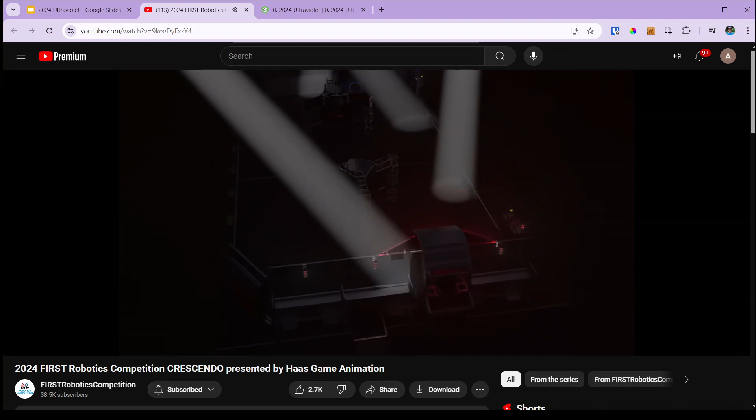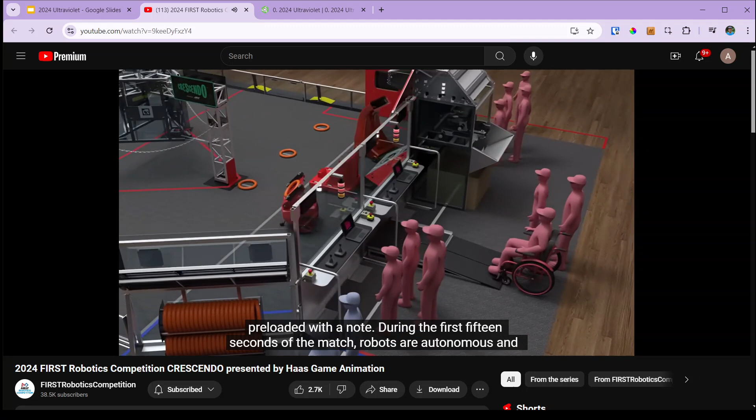Welcome to the 2024 FIRST Robotics Competition game, Crescendo, presented by Haas. 2 alliances of 3 teams each compete to score or play notes in 3 different field elements, amplify their speaker, get on stage, harmonize, and take the spotlight before time runs out. Alliances earn additional rewards for meeting specific scoring thresholds and for cooperating with their opponents. Robots start each match inside their alliance's starting zone and may be preloaded with a note. During the first 15 seconds of the match, robots are autonomous and can be programmed to leave their starting zone, play preloaded notes in their speaker or amp, and collect and play additional notes.

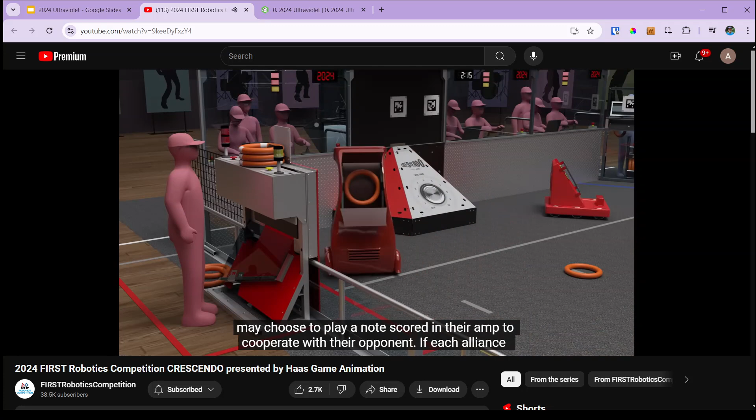During the following 2 minutes and 15 seconds, drivers control their robots. Robots collect notes from human players at their source and play them in their amp and speaker. Each time an alliance plays 2 notes in their amp, the human player can hit a button to amplify their speaker for 10 seconds. Notes played in an amplified speaker are worth more points than those scored in an unamplified speaker. A human player may choose to play a note scored in their amp to cooperate with their opponent. If each alliance plays a note by hitting their Coopertition button in the first 45 seconds of teleop, all teams in the match receive a Coopertition point, which will influence a team's rank in the tournament. The number of played notes needed for a bonus ranking point is also reduced.

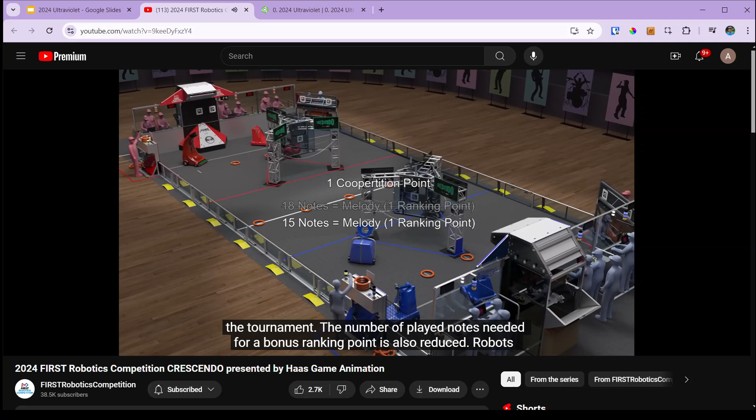Robots are protected from contact by their opponents when at their podium, off the ground, and during the last 20 seconds of the match while in contact with their stage. As time runs out, robots race to get on stage and deliver notes through the flap and into the trap. Bonus points are awarded for harmony when robots on stage use the same chain. On-stage robots earn even more points if a human player spotlights the robots on a chain by scoring a note on the chain's corresponding microphone. The alliance that earns the most points wins the match.

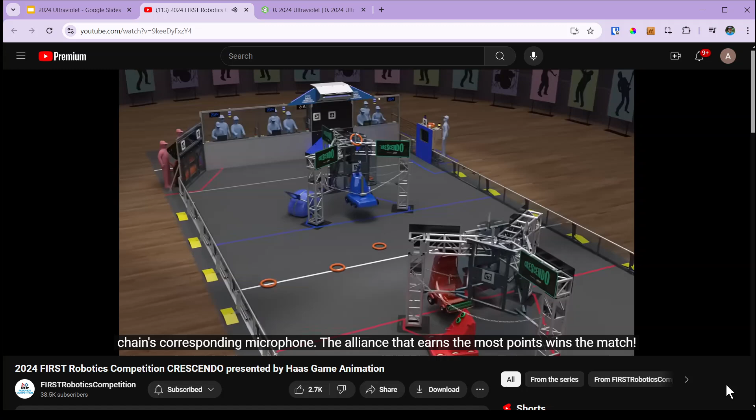All right. So looking at that, basically how we're given the challenge every year is we have some sort of animation, then we're also given the full manual, which goes through all the exact rules. So the animation kind of gives us a summary, gives us kind of an idea of how we're going to have to play the game and what kind of tasks we have to do.

But then our job is to read through the entire manual and kind of start figuring out how do we actually think robot play is going to work, and how do we start breaking down the actual tasks that the robot is going to have to do for us to be able to design a quality robot that's going to do well at the actual events.

So even though that was like that 2-minute video and it talks about all of the different things the robot can do, we end up breaking it down to a relatively small subset of things, what we actually care about doing. And so the simplest form of this game is the robot has to be able to pick up notes.

They don't actually have to, right? You could have them always get them from the human player and get them dropped in. But we just know that was going to be slower, right? If you ever miss a note, you don't want to have to drive all the way down to the other end of the field, get a new one. You'd rather just be able to pick it up and score it again. We need to be able to launch notes into the speaker. That's where you get a lot of the points, from putting them in the speaker directly.

And then the amp was there to be able to make your score even higher if you could coordinate basically the pattern at which you were scoring. And so we wanted to be able to amp really fast too. And then for the end game, the way it all ended up playing out with points, it made the most sense, if you could do it quickly at least, to climb and put a note in the trap. So if you were going to do everything in the game, you basically had to do those 4 things very well.

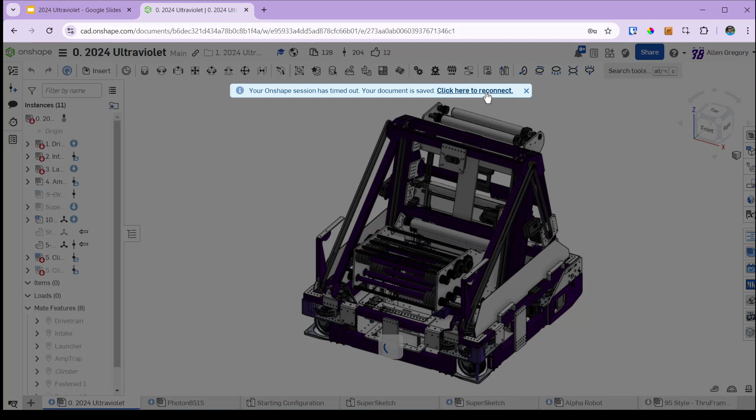All of the robot CAD for our team is done inside of Onshape. It's a browser-based CAD program that lets us fully design every part of it; every hole on the robot is fully done in CAD before we ever produce anything. There's some stuff that we won't CAD exactly, so a lot of the actual wiring and things we won't put into CAD, but we will think about where it all goes.

So we do know if we put a motor somewhere that has to have wires running to it, we do have to think about how the wires are going to get to that motor. And so we will leave space sometimes, or we will sometimes CAD different parts of it to make sure we have a good concept of where the wiring is going to go. But nearly everything else, pretty much every mechanical feature of the robot, any piece of plastic, anything like that, will get put into CAD.

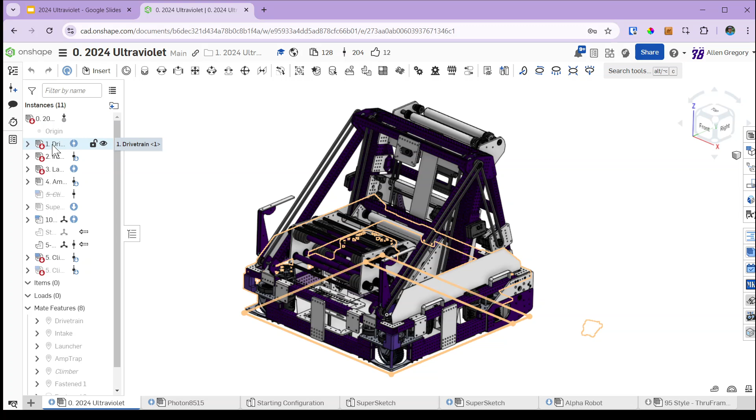Okay, so looking through this, we end up having 5 subsystems. That's roughly what we try to break robots into. Sometimes we have to get up to 6. Sometimes there might be fewer if the robot ends up having some things that are more integrated. But there's roughly 5. And so the 5 that are on this robot are the drivetrain, the intake, the launcher, the amp trap mechanism that's able to put the notes in the amp and then also extend higher and put them into the trap when we climb, and then the climber itself.

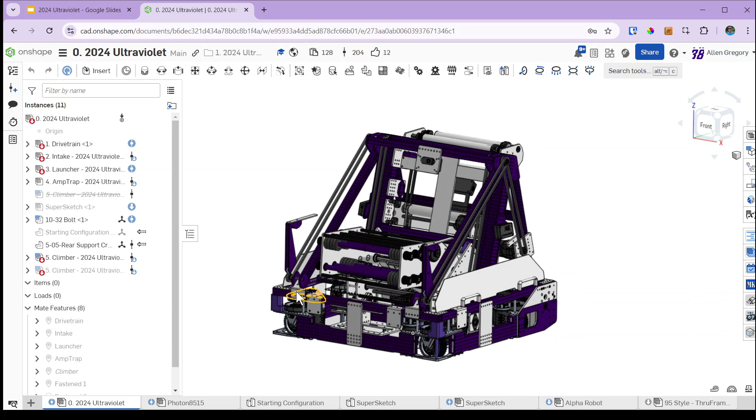The CAD here will have some hidden parts and things, but this is largely pretty much exactly what our competition robot looks like right now. There's a few tweaks that are on the robot that aren't shown in CAD right now. There are different versions of parts and things, but the vast majority of things are correct, or at least in some version of our robot. So our state champs version, this is very much close to what it was looking like.

All right, so we're gonna look at our drivetrain here. So we can open link document and that'll pull us over to just our drivetrain document. And so the drivetrain is relatively simple in this robot. There's not a whole lot going on.

Some of the basics here, we have our frame, so the tubes that go along the outside of the robot are going to be the frame for the robot, and this gives us our base structure to mount everything off of. And then we have our belly pan. And so this connects the main 4 sides of the robot and gives us this middle structure to be able to mount a lot of our electronics. It also holds some amount of the actual robot structure together too. So a lot of these holes are for mounting the AmpTrap elevator and parts of the launcher mounting as well.

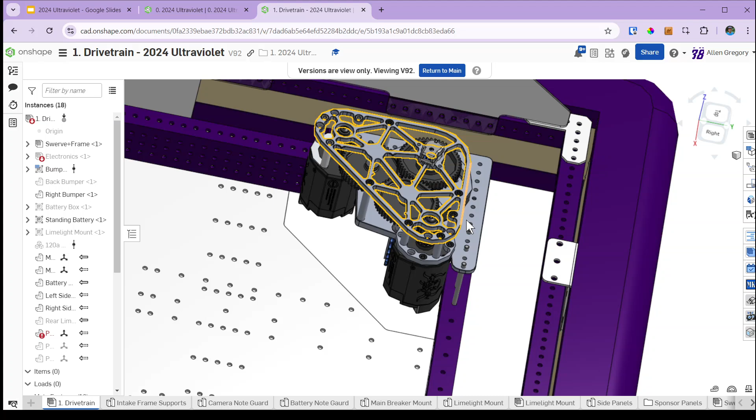The absolute base for the robot, then the way it actually drives, and pretty much for near 80+% of robots now or something along those lines, it's getting higher and higher each year, are our swerve modules. And so in the corner of every competition robot we'll probably build for the foreseeable future, we'll have swerve modules in the 4 corners, unless it's an incredibly strange game for some reason that drives us in some other direction. This kind of standard packaging has become the default. It's pretty much looked the same way since our 2022 robot. They've had pretty similar drivetrains.

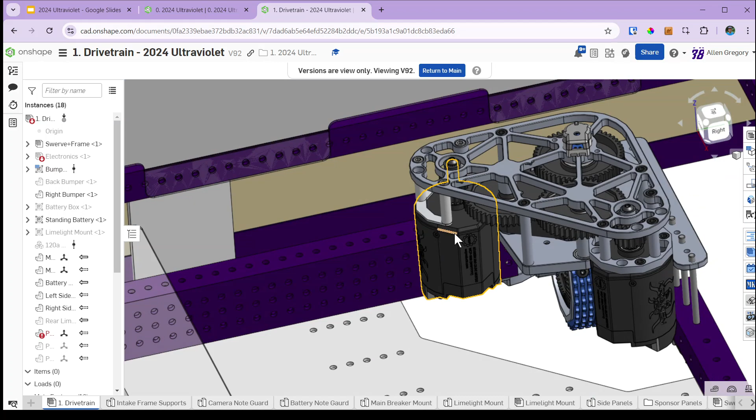The swerve modules work in that you have two motors on each module. So in this one, this motor here is powering the steering of the wheel. So the wheel's able to fully spin 360 degrees and can point in any direction. And then the other motor is powering the actual driving of the wheel, its velocity, which isn't set up in CAD, but you would imagine it like it's driving around, moving the robot. So if all the wheels are pointing in the same direction, that's the direction the robot can go.

But then our software can do all of the math that allows us to have the robot be spinning while driving in any of the straight lines. We can drive sideways at any angle. We can spin in any direction. We can turn the wheels all into like an X configuration, so then the robot can't be pushed very easily. And so all of that's happening without the drivers having to manually turn each wheel or anything. All of that math is being done by the software running on the robot.

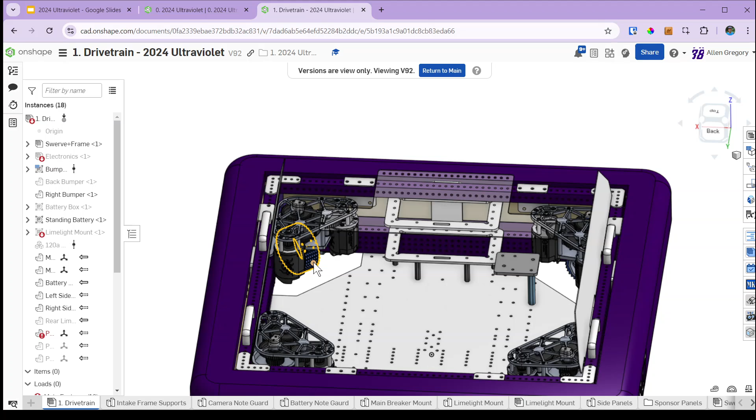So if you point the stick, the one that's controlling the robot, forward, the robot just goes away from you, no matter which way it's pointing. So you can spin it while pointing away from you. It's still going to drive away from you while turning. So it's a very intuitive way to control the robot, and it gives us a lot of flexibility compared to a robot that just has what we'd call standard tank drive or differential drive, where we have 2 rows of wheels on each side, and you're only able to turn kind of like construction equipment, like a skid steer, bulldozer, or something would be able to drive. And that worked for a long time. All of our robots pre 2021 were driven that way, and it did work.

But now swerve has just gotten a lot easier. A lot of the things needed to be able to build these drivetrains have gotten either cheaper or more performative to where they perform better. A lot of the other rules around them were relaxed to make it easier for teams to do. And so more and more teams, pretty much every team, one of their first goals now is to figure out how to get to a productive swerve drive. As you can just do so many more things, and it makes all your other mechanisms easier to build once you're able to drive sideways. And you don't lose any traction or anything either.

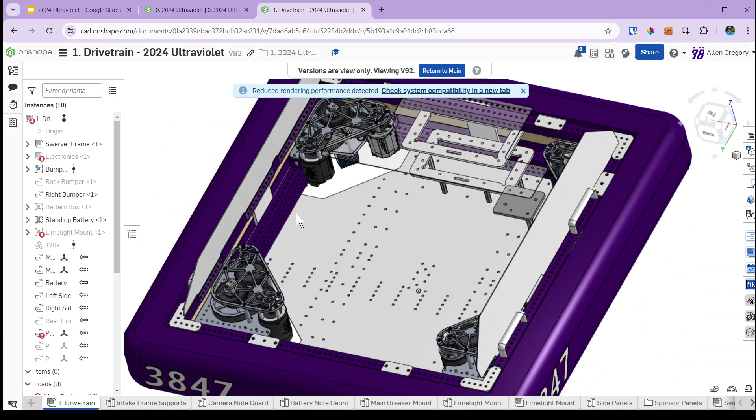Some of the small things we do, so we also have the bumper mounts going around the whole outside. So you have the bumpers here. We can go ahead and hide some of that part. This is the wood on the inside that we needed, so we knew where the holes were. So we're making the templates for that. So that's why those are CADed separately.

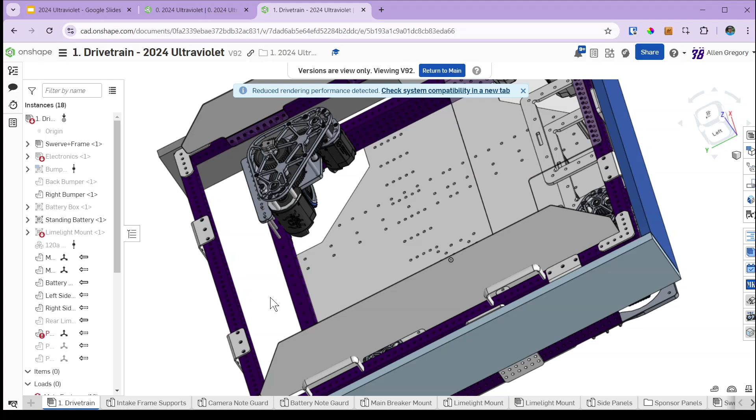And then this one did have some special features compared to most years, where we had this upper frame mounted at a different place than the lower frame, so that our intake could basically be beyond our wheels. This gave us a really wide intake. We'll look at that in just a second. But it did mean our frame had to be a little bit different here. Similarly, we had to have a smaller tube down here so that the note could go over it instead of the 2-inch tall tubes that we have on the sides normally.

There's some other just integrated features into the robot, things like handles, so that we can pick the robot up easily. Those are things that not every team does, but it does make life easier, just the quality of life of having to maneuver the robot, work on it, having the handles to pick it up and off the cart and set it on the field is a lot easier than just trying to grab it by its frame every time.

We also have sponsor panels. These are just polycarb plates that we laser cut, and then we can have printed out posters basically that we can tape to the back or laminate and tape to the back, which let us recognize all our sponsors and make the robot look a little bit better. And the last part of the drivetrain is basically our battery box, which was just a couple pieces. Started off as polycarb, and then they did crack over time. The robot just takes a lot of impacts, so we ended up switching them to aluminum.

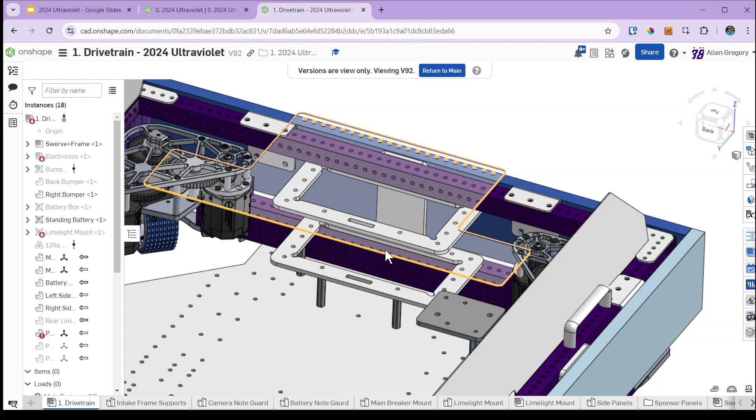But relatively simple. There's some standoffs that connect up into here as well, and then a strap that holds the battery into the robot. There are a few other guards and things to stop the notes from falling into the robot and staying there. You were only allowed to hold one note at a time in this game. And so you didn't want a note getting stuck, so we did a lot of work to make sure the notes couldn't get stuck in the robot. I think that's most of it.

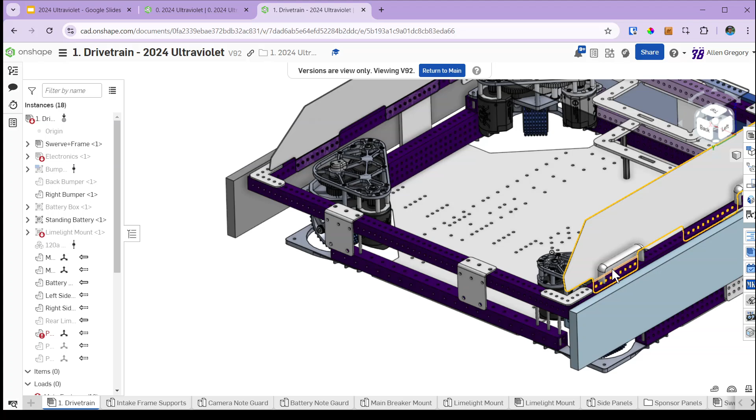This upper frame rail section, so not every team does this either. This is something we borrowed from a team up in Michigan, the Robo Jackets. They had done it on their 2023 robot, and I think a couple of robots before this. And this just gives us a nice mounting place for various mechanisms and things that we're able to attach to when we need to, and you don't have to always be trying to mount to this lower frame, which sometimes gets hard where the swerve modules and things are. You can also mount more stuff into the corners.

It is a bit of a weight hit because you do take the weight of having it, but it does back the bumpers a little bit better, and it just gives you a lot of places and options for mounting quickly when you don't necessarily know everything that's going to be designed into it ahead of time. Having this here is pretty useful, and so we did this on our 2023 off-season robot that we built, and then carried it over into 2024.

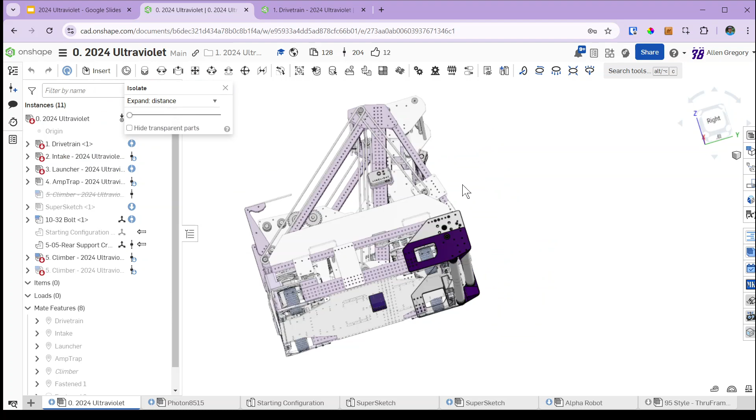From there, we go on to the next mechanism, which this year was the intake. I think we can just do it in here. So you can kind of isolate and see how this works. So everything that's not part of the intake gets hidden. So that gap that we were talking about behind this frame rail is where we're able to stick the intake. This was something we definitely had to prototype quite a bit. We weren't sure exactly how much room we were going to need. We ended up being able to do it in a pretty small amount of space.

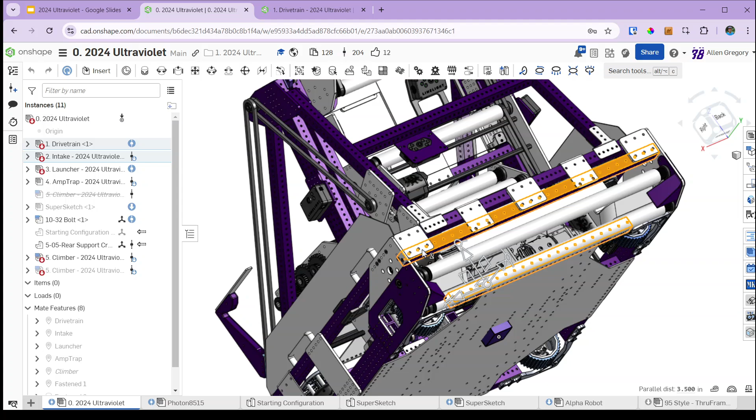I don't think it lets you. Here we can look a little bit. So this whole thing was able to only be in about, what, 3.5 inches. And so this was very much an unknown when we first started. We didn't know how much room we needed to leave beyond the swerve module and behind our normal frame. And this would have impacted quite a few things. So this robot's basically at the max dimensions you can be, or pretty close. It's about 29.5 by 29.5.

And so if we needed the intake to be like a 1/2 inch wider, that would have needed us to move our swerve modules a 1/2 inch forward. They don't really have that right here, so that means our whole elevator would have had to move forward too. So a lot more of the design would have had to change if we needed more room for the intake. So this is one of those things that we had to figure out pretty early if we were going to be satisfied with how much room we left. Was it going to work the way we wanted it to?

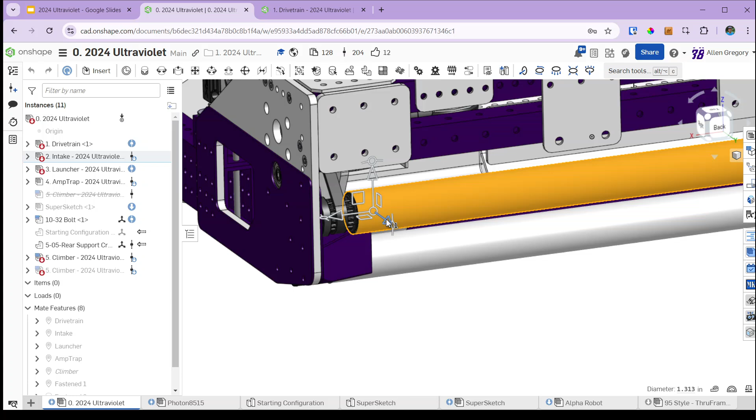And so we built a wooden prototype pretty quickly. We're able to power the rollers and kind of see if we could get it to intake the note as nice as we wanted to. These are a relatively standard way that we had been building various rollers over the years. These are polycarbonate tubes on the inside here. So this is just a clear plastic tube on the inside.

We stretch silicone rubber over the top of it. So we buy silicone rubber tubes that normally have a little bit smaller diameter than the actual plastic one, and we stretch it over it so it gets a good fit and won't roll too much, or it won't slide or anything if it was too big.

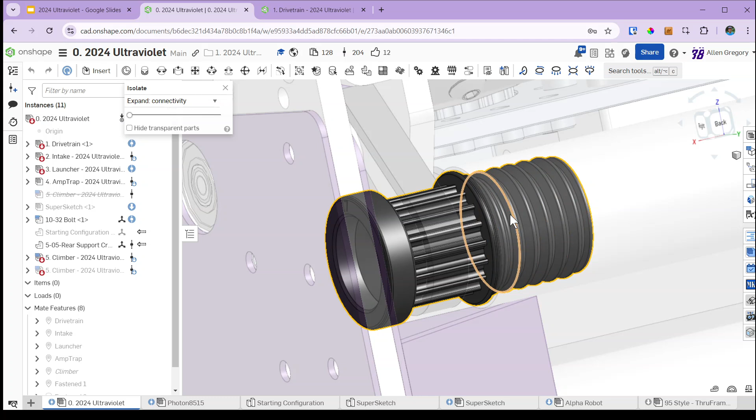And then we're able to print these pulleys on the outside that we use our 3D printers for. And we're able to make this part that we then glue in and then drill and bolt as well, these hubs into the ends of the rollers. So these little gaps are filled with hot glue. Some special industrial hot glue is what we were using, but you could use other things. We wanted them to be able to be removed. We didn't want to use something that was permanent like epoxy, because we did want to be able to swap them out and still keep the roller, because the roller does take some amount of time to make.

And then these also hold the bearings on the inside. So there's a bearing here, and there's a small shaft running through. Let me hide the spacer. And then we have this shaft here that's running all the way across. And so this shaft doesn't spin. So this is what we call a dead axle. So we bolt this shaft directly to the plate.

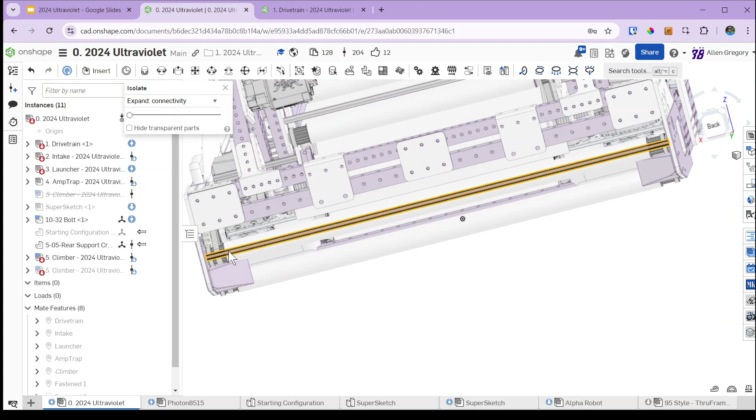And this shaft acts a little bit like a frame member or support for this plate to give this whole thing structure. So it's acting as a standoff going all the way from one side to the other. So you can't squeeze these plates together. So if you do get hit here, or you start trying to bend this, this standoff and the lower one that are made the exact same way prevent that from happening. So it allows your rollers to also act as structure for the whole robot. And so we use this concept quite a bit, where we have this dead axle running through. And so we're not having to spin the axle, we're just having to spin the roller on top of it.

The bearings here are similar to bearings you'd find in a skateboard or anything like that, or a fidget toy, like one of the fidget spinners. They have little balls inside of them that give it very low friction, so we're able to spin these quite fast without them heating up or without them wasting a lot of energy. So anytime we have something that's spinning really fast, we want to make sure we're using ball bearings so that we can reduce that friction as much as possible.

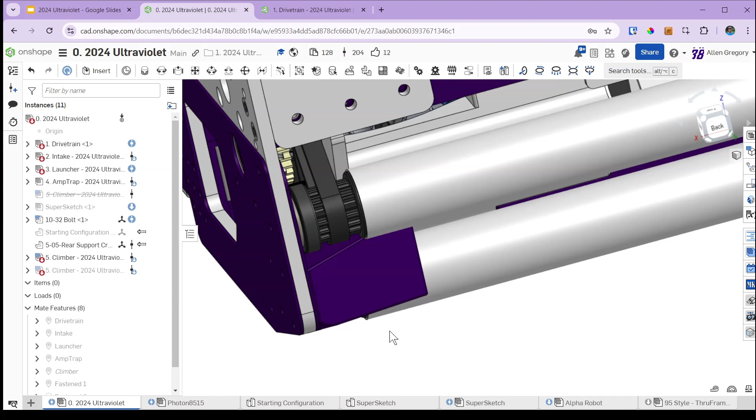The 3D printed pulleys here are powered by this belt. So in CAD, we just have it CADed as a simple rectangle, but in real life, these have the same sort of belt teeth, or the opposite of here, so it can engage and power this and spin it. Inside this gearbox, we have a couple overlapping gears, because originally we were 3D printing this setup, so we had these 3D printed gears. We've stopped doing that. We were able to slip a couple of them early on, so we ended up switching out the way this was powered, and we made a pretty compact way to have a belt and gear here to be able to actually reverse these rollers.

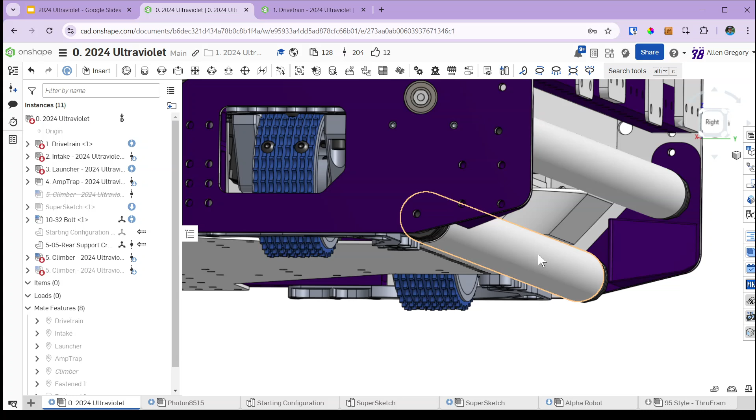So the concept here is that this roller from this direction is spinning counterclockwise, so it's coming around like this. And the roller up on top is spinning clockwise, so it's going in like that, so that once the note touches here, it kind of gets lifted up, touches this one, and then gets sucked into the robot. So because we need to have these spinning in opposite directions, we can't just power both of them from a belt from the same motor, or they would always be spinning in the same direction.

Let me hide the little wedge here. And so these two gears up here are what give us that reversing effect. One of the simpler ways to reverse motion is just to have two gears. Since they're meshed together, they'll always be reversing each other's direction. So this one at the top is going to spin the same direction as this roller, since it's belted directly from the motor shaft. And then since this one is now reversing, we can have another pulley here that powers this lower shaft. So we can have a very compact gearing solution. It doesn't take up very much space at all. We knew we didn't want it to take up too much room, right?

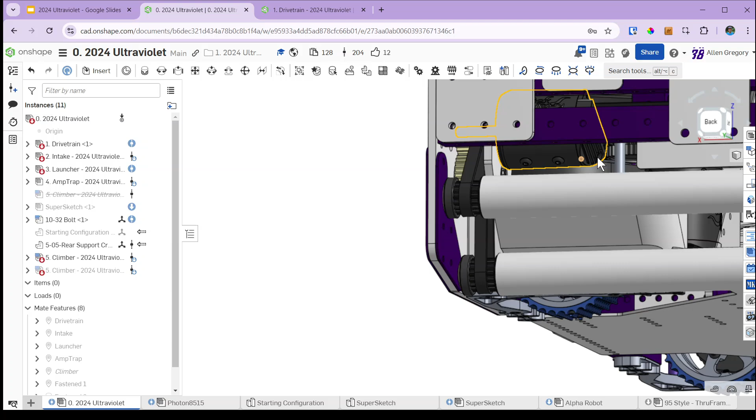It could have come back a little bit, but it couldn't really go that much further out, or it was going to start hitting the swerve module, or it was going to start hitting the frame here. So we had to package it in a pretty small space to actually allow it to do what we needed it to for us to be able to intake.

A couple simple things we also do. We knew we didn't really want our intake to be intaking all the way over here on the corner. It's pretty bad sometimes if you can get some jams in there. It's harder to get. Same with over here, you don't want it to go up into these belts at all. And so we put the little wedges there to kind of stop the note from catching too early.

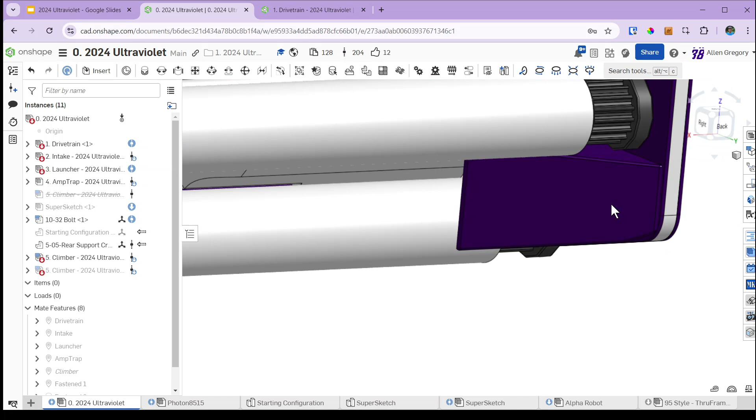That also allowed us just to leave these pulleys over on this side of the roller. These aren't used on the robot directly, but it does allow us to have spare parts basically built in. So if something were to happen to the teeth on this pulley, all we have to do to be ready for the next match is unbolt here and from the other side and flip the roller around because it's symmetrical, and we can start using this brand new untouched pulley immediately without even having to do any repair work, without having to have a spare somewhere else. We have the spare basically built in to the robot.

This also allows us to make everything symmetrical. We don't have to worry about different pulleys being different. There was also some ability, since this whole setup is symmetrical, if we really wanted to, we could have had a mirrored version of this gearbox and motor over on the other side. And at some point in the middle of the season, we could have decided, oh, we want two motors powering our intake, and we could have done that.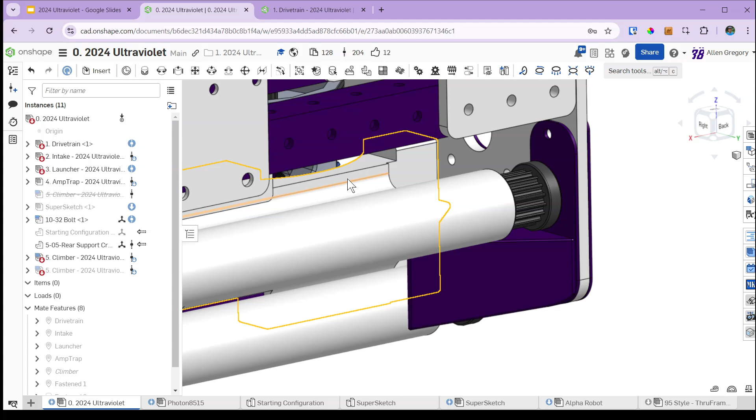It allows every part to be the same from both sides, we just have to mirror them when we print. So these wedges here, they just get printed mirrored, so we don't have to do a whole different design. Keeping things symmetrical allows it to be a lot simpler and gives us some flexibility throughout the year. If anything were to happen, we can change the robot a little bit and make that work.

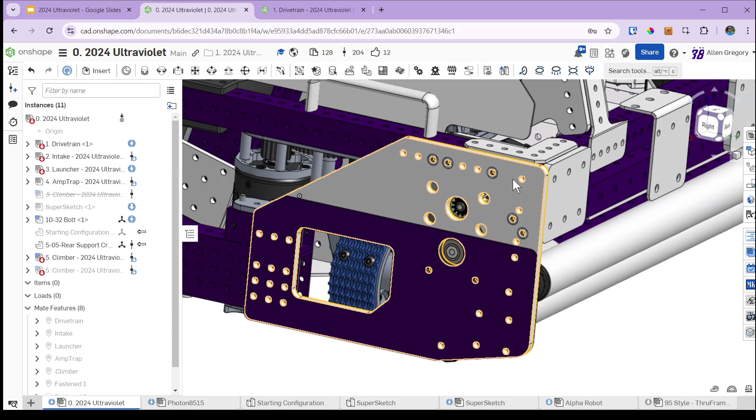So let's talk about the other parts of the intake. So these outside plates were done on our laser cutter. They were originally just polycarbonate that we laser cut. They attached down to the frame members and up to this upper frame to give it some more support. But we did have some issues with them cracking in certain places. And we were worried that potentially we'd have some of these bolt holes crack and the rollers wouldn't be correct, and we might lose the intake during a match, and we really didn't want that.

So we were able to get the room to add a little bit of shim plate. So we had some metal plate that we would add to the inside and outside that just secured it so that even if the polycarb on the inside cracked a little bit, you'd always have security around where the bolt holes are. And the plate would be a little bit stronger, so it could always keep running no matter what. So there were a few times where we had to replace things, but once we did do the shimming, this worked pretty well all season.

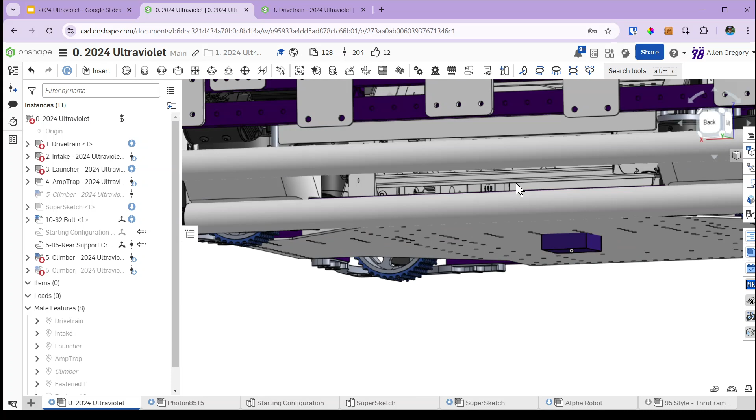In addition, we have these wedges here. This was a little bit unintuitive, how we wanted to be able to funnel the note into the center opening. There's really only room for the note, how big it is. It's like 13 inches wide, I believe. There's really only room for it once you account for these motors on the side here for the module. It really goes in without much room on either side.

And so part of that was, how do we make sure that if we do get the front of the note intaked into here, it can wrap around and get centered the way we want it to? And a lot of teams solved this in a variety of ways. Some teams had powered wheels that were spinning here at an angle, kind of shoving the note over.

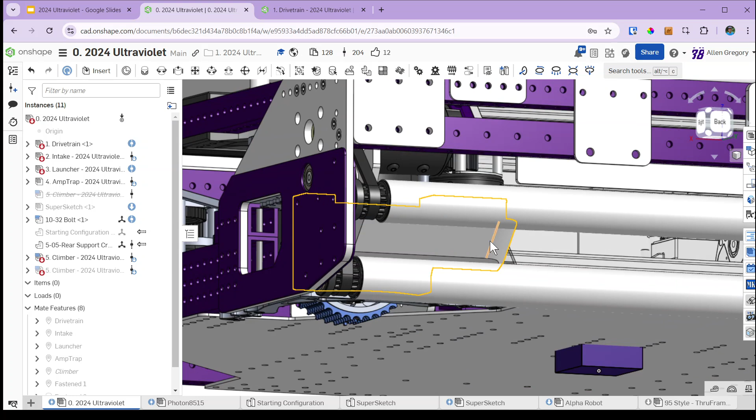Yeah, there were several different options for how to do it. We wanted to make sure we could do it ideally passively. It had just less components if we don't have to have anything spinning here. And so we were able to test a couple different things, and this one ended up being a pretty early prototype that we've left all season because it largely did what we want.

But for the most part, what it does is the note can come in, can get hit here, and it sort of gets pinched, but it doesn't let it keep going up at all. And so as it does that, the note almost gets like flattened out, and more of the note gets sucked into parts of the roller. And then once the part gets sucked in over here, it's able to get pushed through more, and the whole thing sort of just rotates around and gets sucked through more of this main opening because it can't keep going through over here.

So it already has it in its possession here, but it can't actually get jammed because there's no place for it to go. So this wall sort of just stops the note from getting jammed or pinched too much, but still pinched enough to where it actually does grab it. And then it just waits a very, very small amount of time because the rollers are spinning so fast for the rest of the note to spin in around this curved part and up into our robot.

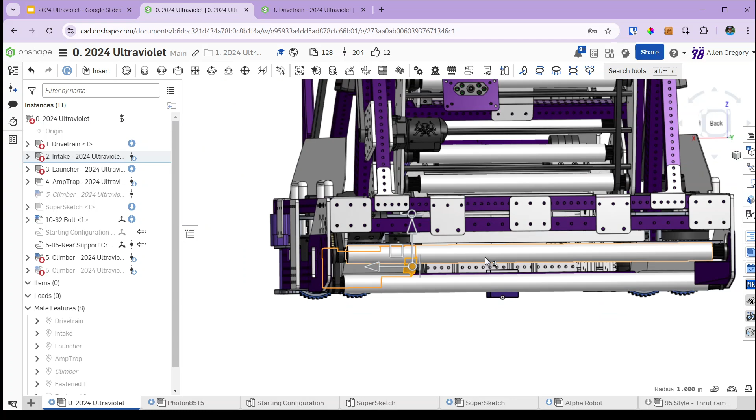There's a ramp here that it then gets shoved up and gets caught by our indexer that gets ready to either feed it into the launcher or feed it up into the amp trap.

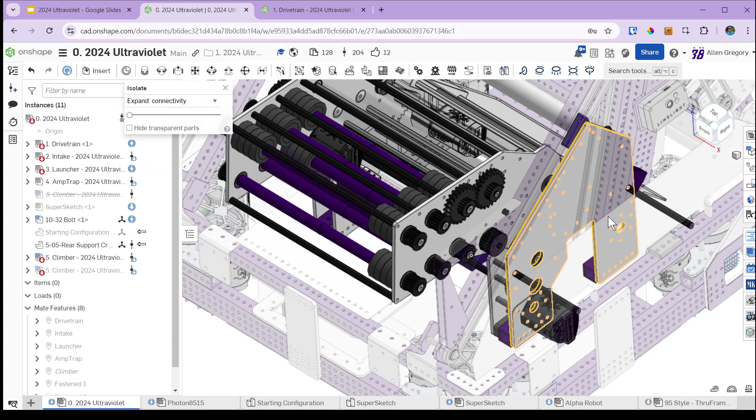All right, so from the intake, we can start looking at our launcher. So if we isolate that here, this was a little bit interesting in that we didn't have a lot of good places to secure it. We didn't have rails running the whole length of the robot, because we had the elevator in the middle and some other things. It didn't make sense to have a full rail. So we were able to just put these blocks of 1x1 down here attached directly to the belly pan.

And then we did have a few places where we could attach the launcher out with standoffs to the frame to stop it from wiggling side to side too much. And that did seem to work. So we were packaging this whole thing inside of these elevator rails that you can see. So nothing could touch out there. Nothing could be mounted because all this part's going to go up and down, which we'll see in just a little bit.

Again, almost all of these white parts are done on the laser cutter. So we're able to design all these shapes, exactly where these holes are, and then cut them out. And so we had a couple different iterations of this to get to where we wanted. We were able to use these mounting plates as our gearbox here. So we designed in from our motor down here. We have some more gear reductions.

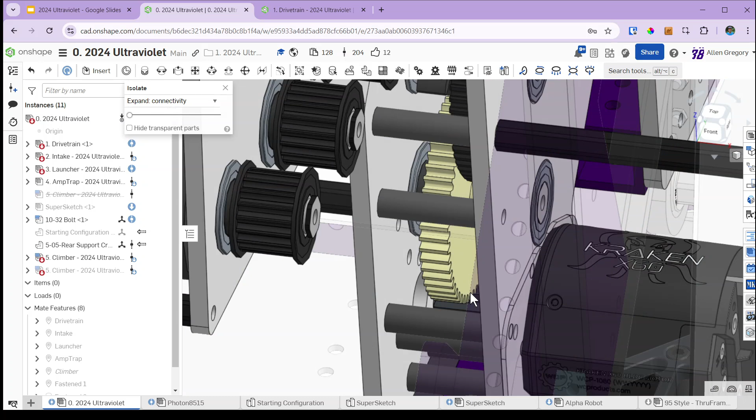So the motors are spinning very, very fast, and we use our gear reductions to slow them down while still using all of their energy. If you just give them less voltage or tell them to spin slower, they're not able to actually use all of the power that they have. So we use gearing to be able to use all of the power they have at a slower speed, because we don't want this to rotate very fast. We need this to move a pretty small amount.

It goes from about 0 degrees, it can shoot about flat, up to 70 or so degrees. And so that's all this whole thing tilting up and down. And so we need that gear reduction to be able to use the majority of the motor's energy when needed, but at a much slower speed. So we gear down most of our applications unless we need it to spin really, really fast for some reason. So that's what this gear train is here.

It comes up into these larger gears. So we have a couple different sized gear teeth. You can see these gear teeth are really large.

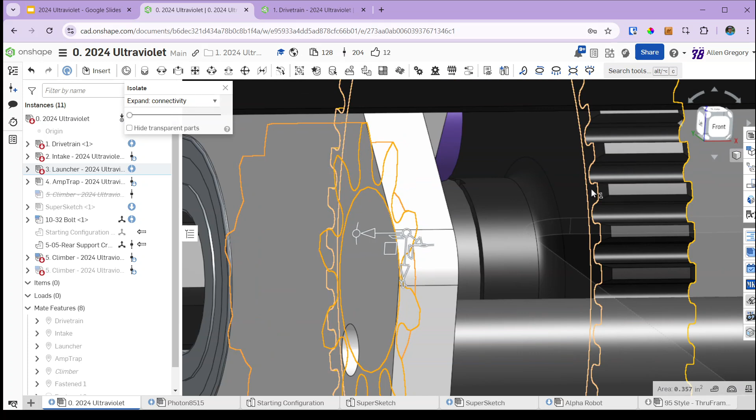These ones are a little bit smaller. This is called the pitch of the gears. So if you have smaller teeth, you have a bigger number pitch. So this is a 20 DP gear. It's like the standard size. And then these bigger teeth ones are a 10 DP gear. And so we wanted to use these bigger teeth so that they're not going to bend or crack as much, because we had to make our own into this plate.

And so this plate here sort of acts like a really big gear, but only a section of it. And so as this one turns, this one moves up and down on top of it. And that's how we're able to set the angle of our launcher. Let me see if I can grab the other face, make it look a little better. There we go.

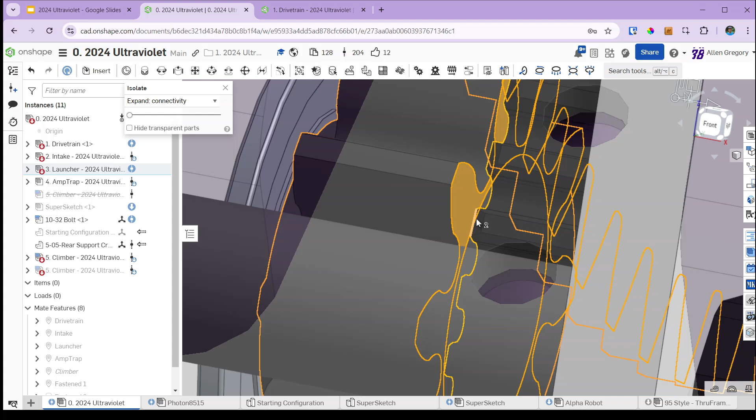So as the motor turns, it eventually spins this gear. There's one on the other side as well. And this whole thing sort of acts like a rack and can tilt the whole launcher up, and we can set exactly the angle we want to fire the note out at. It shares the same shaft over here to power a second gear. Oh, I got a little bit wild, sorry. So we have another gear here that's doing the same thing.

And then these gears are just 3D printed because they don't have any load going on them. They're here to give us another sensor that can tell us the exact angle of our launcher. And this worked out pretty well. These are geared down so that for the motion of our launcher, this spins slightly under one rotation so that we can use the entire range of this encoder.

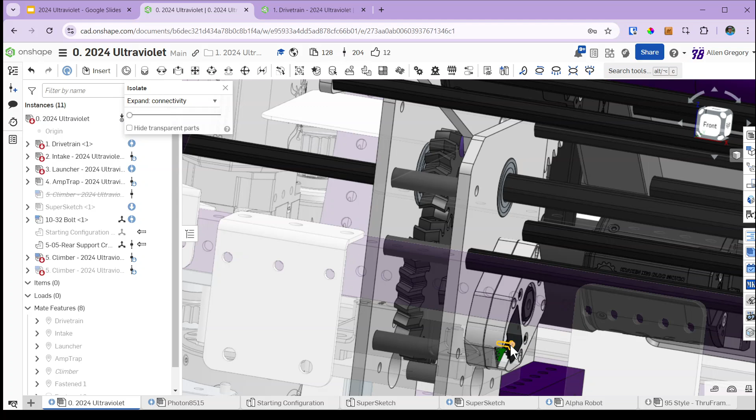This encoder can basically tell us where it is exactly in a single rotation. So it reads back in our software like 0 to 0.96 or so. And so that gives us really fine control of where exactly we're pointing the launcher at. The launcher has two other motors on it. One we call the indexer. This is what takes the note from the intake and stores it and gets it ready to feed it into the launcher when we're ready to fire.

So that motor's down here, and it has a belt that runs up and powers this roller. These are very similar to the intake rollers. They're basically made exactly the same way. Whenever possible on our robots, if we can standardize a part or standardize a way to do something and use that same system over and over again, that makes the season go a lot easier.

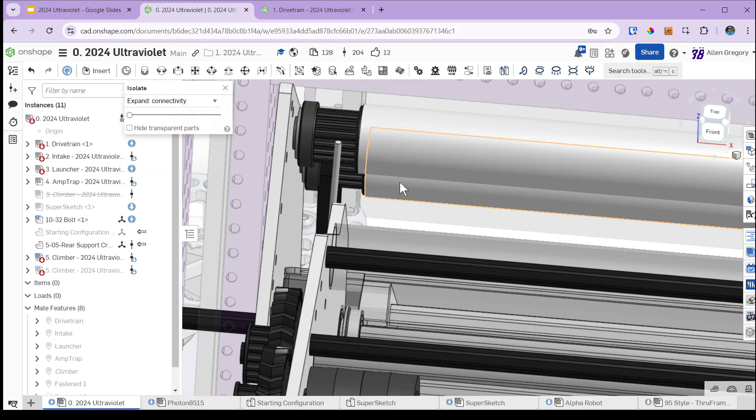If everyone learns how to make this roller, then they can just make it at different lengths to the intake, to the indexer, to the amp trap. They're all basically the same. They just have slightly different length tubes for whatever their application is. And so we can just batch print a ton of these. We probably printed, I don't know, 50, 60 of these easily this season, if not more.

And so that's able to get powered by a second belt. So both of these rollers spin together. And they're able to hold the note before we actually feed it into the launcher. We do have a sensor that lets us know when the note is there. So the sensor itself isn't in CAD, I don't think, but this is the mounting block for it.

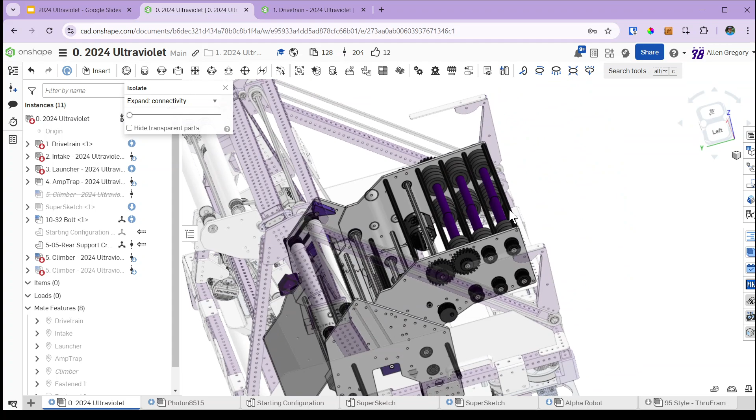And so this lets us see as the note comes up where it is along this path and kind of stage it in the same place every time before we feed the launcher, because we really want consistent results coming out of the launcher so that every time the note goes exactly where we want it to. That's the goal, at least. The launcher itself has two motors on it. There's a motor on the left and right side.

And what we ended up doing, which isn't quite shown here exactly, we ended up changing a couple things. But originally we had both motors powering the top and bottom of our roller assemblies here. And we ended up changing that, and also a couple other things changed that aren't shown here. These wheels don't exist in real life.

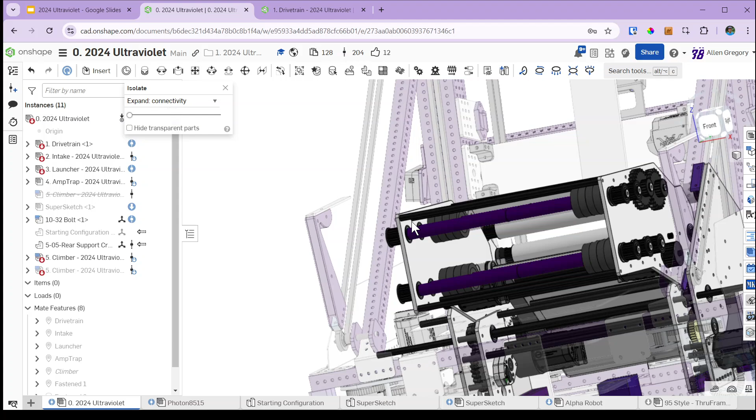There we go. Okay. So what we ended up doing was having one of these motors directly power the lower side, and then this motor directly powered the top side, and they weren't connected between them. So we had one motor powering the top and one motor powering the bottom. And that was to make the whole system more efficient. The motors would draw less power when they weren't attached to each other versus when they were. And we also changed some of the exact belting and stuff as well to tweak all of that.

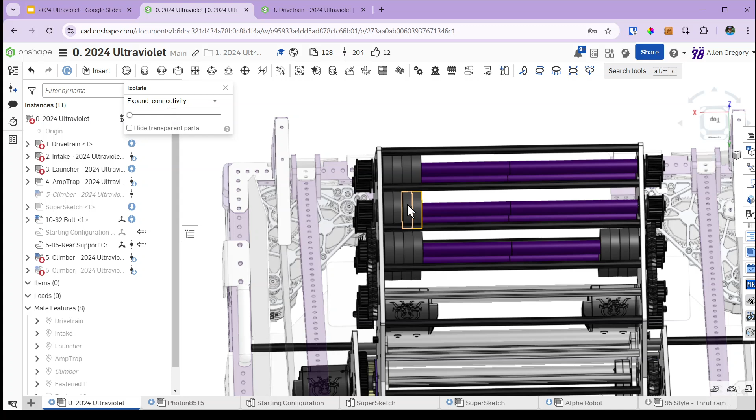This launcher looks a little bit different because, when you see it on the real robot, it has 6 wheels on one side and then it only has 2 wheels on the other. The concept there was that basically this first row of wheels imparts a good amount of actual velocity on the note. So this is accelerating it, getting it moving faster. And then these two extra wheels on just the left side provide the note with a lot of spin, because we found that it makes it a lot more stable when you do have the note spinning. And so these two help give it a lot more spin when it comes out.

There's a few things as well that we did. The walls in here on the launcher are coated with Teflon, so that we can reduce that friction really down a lot. Teflon, the same stuff that's on non-stick pans and things, also known as PTFE. And so the walls of those are all slick, so that the note when it's rubbing against them isn't gaining too much friction.

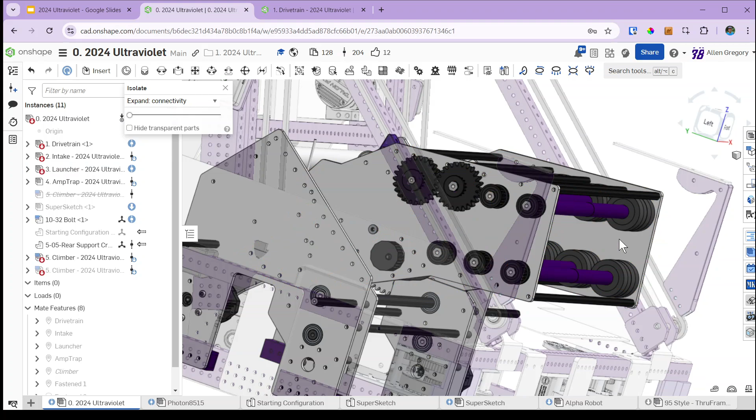We did have this a little bit smaller than an actual note, I believe. Yeah, it was like 13.5 inches, so the note compresses a little bit to come through, because the note's like 14 inches wide, something like that. And so it does actually rub the walls a little bit as it's coming through here, but that keeps it perfectly centered. And so we know where it is when it's exiting. It doesn't have the ability to be too far left or too far right. I think that's most of the launcher.

Again, we do use the gears to do the reversing here. We didn't actually need it once we ended up changing it to where we had one motor powering the top. We could have had them spinning in opposite directions directly, but we did end up leaving one of the reversing gears just because of the way the layout was. We didn't want to change all of the belt lengths everywhere.

These gears up here are all going to be printed. These are versions that we've shown a little bit, but not a ton. Any of the metal gears we had, like on the pivot, those had straight teeth. These gears that have this angle in them are called a herringbone gear, or sometimes a double helical gear. For the most part, they're more efficient. They give you more gear contact when they're touching each other. They're just incredibly expensive to produce if you're trying to make them out of metal.

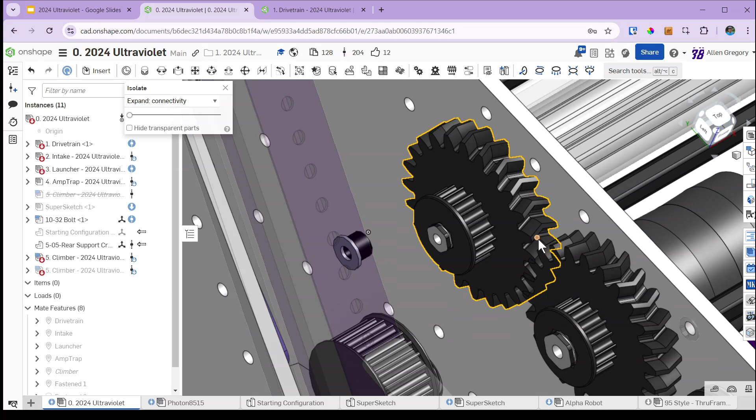And so if we're not using metal gears anywhere and we're just printing them, we will almost always print 10 DP herringbone gears, as they're just stronger out of plastic, and it costs us nothing extra to print them. And then if we ever needed them to be metal, we would swap them both to regular straight spur gears that are 20 DP, and all the gear spacing would still line up. You just double the number of teeth, going from 10 to 20.

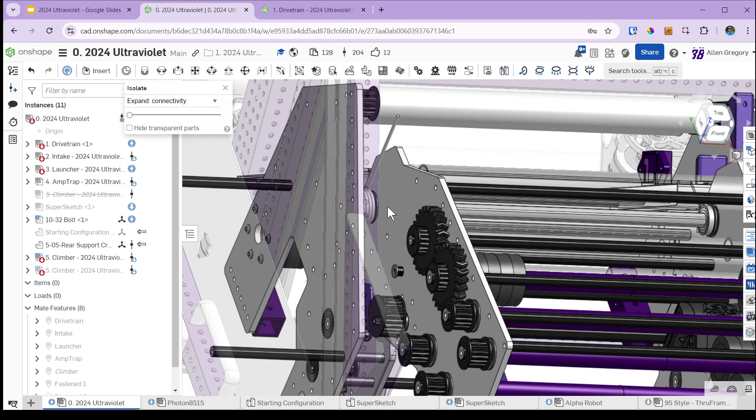Let's see. I think that's most everything. We had a couple little things that we were doing early on. We had springs assisting the launcher. We ended up stopping that. These torsion springs that you'd find in like a mouse trap were there to help hold off some of the weight. But we ended up realizing we didn't need it. The motor was more than strong enough to hold the launcher wherever we needed as we geared it down. So we ended up removing the springs from that setup.

All right, so that's one of the ways we could score the note. The other two ways we need to score the note rely on our amp trap mechanism. This had quite a lot going on. This was an elevator along with a roller system. And so the elevator was able to take the note, raise it up, and then deposit it into the amp, or if we had already climbed, deposit it into the trap.

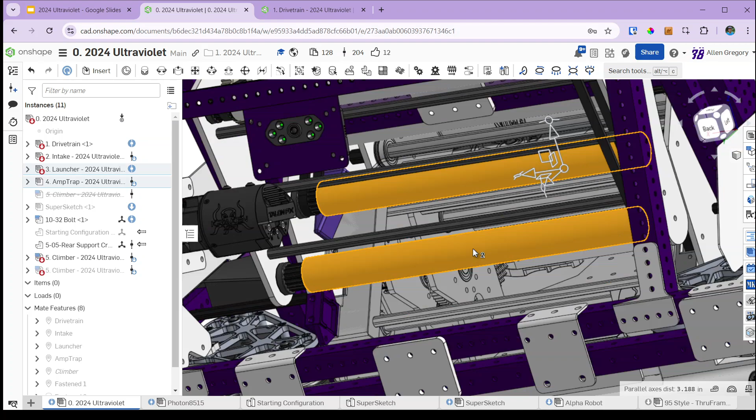Coming back down, the way that transfer actually works is it relies on these two rollers. This lower roller here is powered by the amp trap. Very similar to how the intake is done, this has a motor here and a gear reduction, because we needed to spin it down. We need to make it go a little bit slower and have that more usable power at the speeds we needed, so we get more torque by having this gear reduction. And then it's belted out to this first roller.

And then over on this side, we have a belt going up to the third roller and a belt going down to the first one. So all of these are able to spin together. In addition, we have a couple of the top hood rollers up here that are also able to spin, but these get reversed on the actual mechanism.

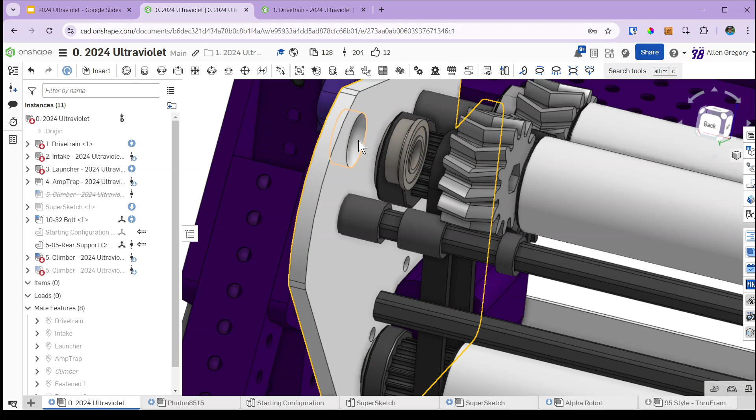Nope, that's not what I wanted. Seem to have lost the... Okay, there's a few things in Amp Trap that are missing, but we can talk about those in a second.

Okay, so these two are powered on different motors, so that when we have the indexer basically reversing, trying to send the note back down towards the intake, and this roller is spinning up, so from this side view this is spinning counterclockwise and this is spinning clockwise, they're able to drive the note up through this gap and feed it on top of this back panel right here into the next rollers to get it to sit up in this area where it's stored, ready to be taken up to the amp or the trap.

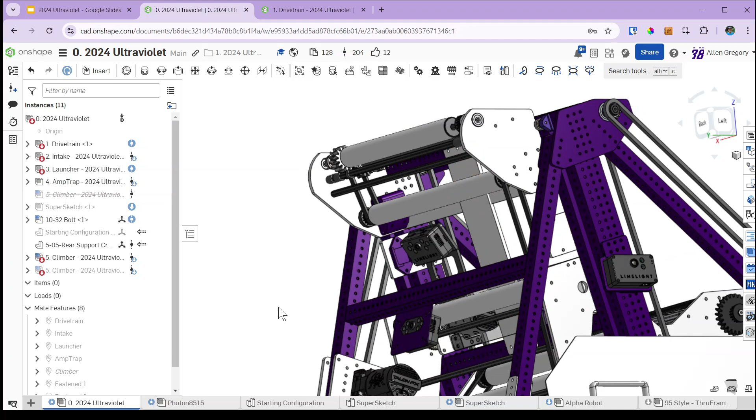There was a lot of different testing and iterating that went into this. We had to make sure that we could get this gap correct and that it would actually work to feed up. There are a few times where if the roller isn't clean or if something gets a little bit off, the note doesn't always want to transfer. So we had to play with that quite a bit this season to make sure it was going to do that every time in the match.

And then we also put quite a bit of work into making sure that the amp scoring and trap scoring could work at the same time. It was relatively easy to do one or the other. It wasn't very easy to do them both with the same configuration of rollers up here. And so what we ended up finding is we did have these gears. This is a different version; we need to fix this in CAD. This is one of the ones that we ended up not using. The competition one is a little bit lower, and a few different tweaks went into it.

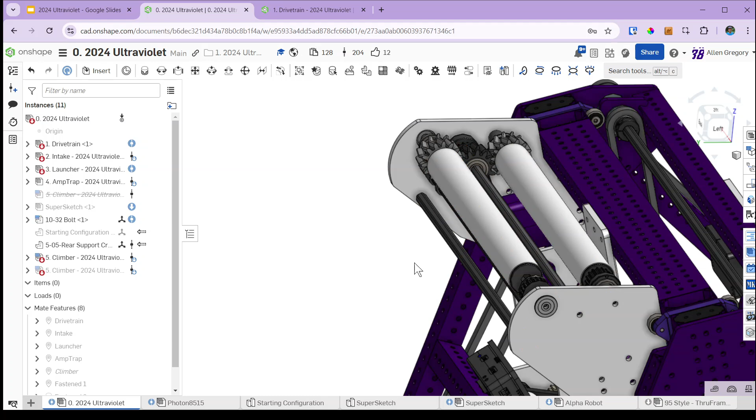But we did have these two rollers up here that help actually drive it out and down, so the notes kind of come in this way. And then we had what we called our cape, which is a roller that's on its own bearings out here, and was basically able to flip up out of the way when we were scoring into the amp. The note could kind of come out straight.

And then when it was held against the wall by the trap, because you're climbing up on this polycarb surface, that roller helped force the note down and into the trap because it was held up against the wall after it climbed. And so that little bit of play, without having to add an extra motor or have anything powered differently, allowed us to amp a lot nicer and allowed us to trap this year, because we had that moving piece there that could move around when we did it. Okay.

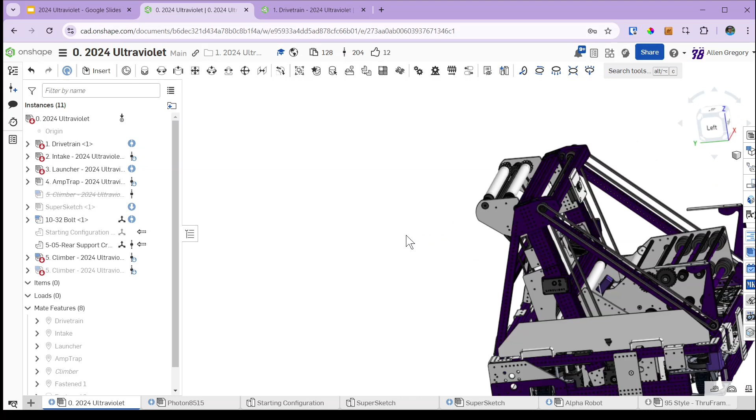The elevator itself, before we go on to climber, because these are both pretty similar, is basically just a motor and chain. So here's our motor. This gearbox is called a MAX Planetary, and we have it outputting into a MAX Planetary 90, or a MAX 90. This gives us a unique ability to just drive a hex shaft directly. It has this through bore hex shaft, so we can have a really long output without an extra gear, belt or pulley connecting it. So this is very convenient to package, and it makes it very simple.

The MAX Planetary also has a big advantage: you can change the gear ratio here. So if we wanted to have more gear reduction, we can add multiple stages, or we can change the stages. And so it allows a lot of flexibility in season to change how we want this to work without having to redesign much of anything.

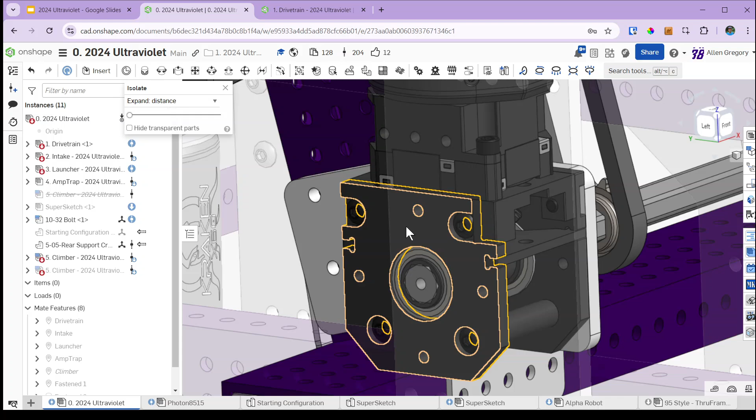We could just do it on the robot directly without having to get back in CAD and make a new gearbox or anything. So this shaft connects all the way across the robot to a bearing on this side, and it has these two sprockets and these two runs of chain, and they are what actually do the lifting up and down of the elevator.

So if the elevator is in its up position, the motor turns this way, and we have these blocks here that are mounted to the chain, and so they can start pulling down this whole mechanism, and we can very easily position control that so we know exactly where the elevator is. Whenever we tell it to go to a certain set point, we can know exactly where it's going, and it lifts up and down. The elevator itself rides on these bearing blocks.

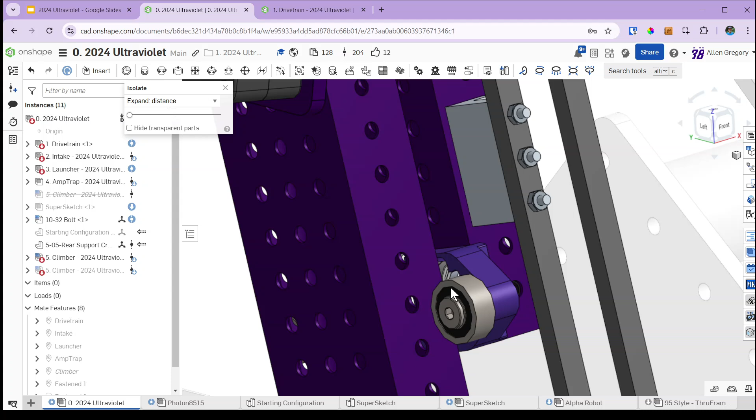So we have ball bearings again. There's ball bearings pretty much anytime we have any sort of long distance motion or fast motion. We're going to use bearings to help be the sliders. And so these are going to roll along the surface of this tube, both on the outside faces, and we have bearings on the inside here that roll along the inside face. And then we have another set that are stationary up at the top that are doing the same thing.

And so that's kind of what you want to do in almost every elevator design. Some of just elevator basics is you pretty much want these two sets of bearings to get closer together as it extends. So as it goes up, these bearings get closer together, and then as we go back down, they get really far apart. And so that's pretty much the basics of how almost every FRC elevator works. Sometimes you'll have all moving bearings and they have to like catch back onto here. That's kind of a unique situation.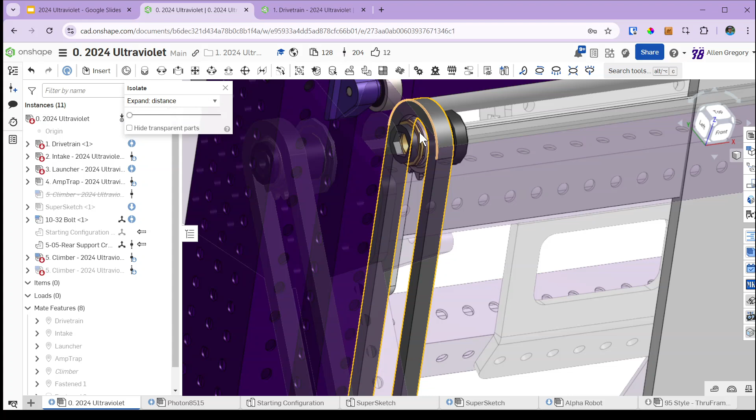We do have to have something to hold the chain up at the top. So we have these idler sprockets up here. So these are just spinning on bushings. So this is a place where we couldn't use a ball bearing like we would want to. So this is just a bit of brass that has oil and lubricant kind of built into it. And since this mechanism doesn't spin all that fast, we're not too worried about it needing to be a ball bearing. It's a little inefficient.

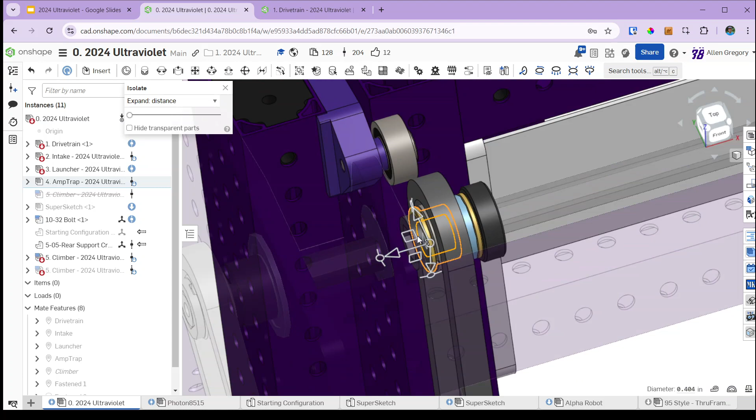It loses some energy to heat or friction, but that's okay in this regard. It doesn't actually hurt us that much. It's not moving that quickly, and it allows us to package it into this really small space that we needed it to be in, right? Because you can see the clearances here are pretty tight. These are almost touching, but we allow them not to because we have designed it well in CAD. So this is one reason why we have to CAD everything. You wouldn't want to try to build this without knowing exactly how close it's going to be in real life.

All right, so looking at our climber, these are actually somewhat connected systems. So the top sprocket of our elevator is spinning basically as an idler, so it doesn't spin at the same time as the shaft spins. It just spins on top of it however it needs to on the power shaft for our climber. So this hex shaft here is driven by some sprockets. So we have some sprockets here that work with the chain.

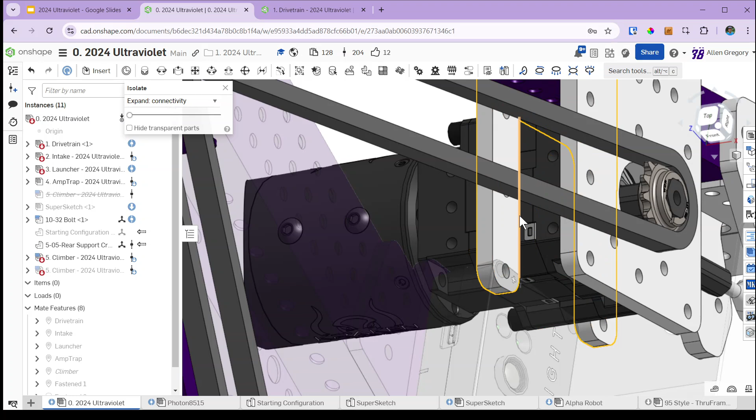And now we have our motor and gearbox that actually does the climbing. It's mounted here in the back. Again, it's this MAXPlanetary gearbox. We use it a lot if we're not 100% sure which ratio we need or if it's going to package nicely. This works out very well. It was in a space that we didn't have anything else. So we didn't need to build a custom gearbox here. We could use one that we can just grab off the shelf and go.

It has an output sprocket that's going to turn that shaft. And then it's going to turn these two chain runs, which are our main climber runs. This took quite a bit of iterating too. We originally had these carriages for our climber that would actually slide up and down these rails, kind of like how our elevator does.

They'd have bearings that rolled on these tubes, but it wasn't quite giving us enough height, and so we ended up changing the way we did it, and we bolted these nut strips directly to the chain. The chain has holes in it, and we were able to use number 4-40 bolts, some really tiny bolts, but several of them. So we had like 4 bolts going through into the chain there and bolted down.

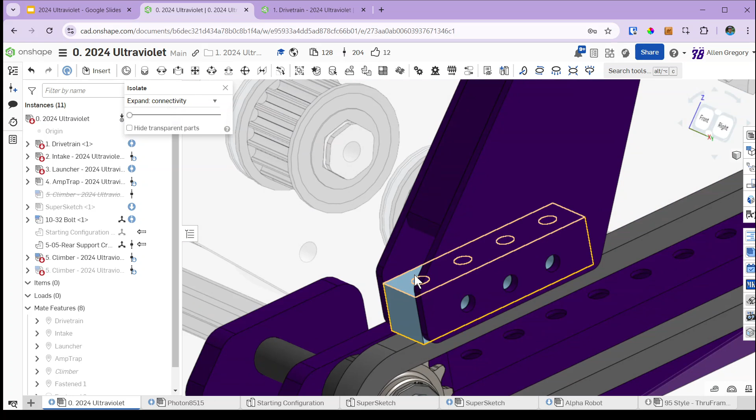And then we had some metal plates on the outside here with a 3D printed little insert sandwiched on the inside. And that let us directly mount the hooks to the chain without having to have any guide bars or anything here. So we wouldn't necessarily want to do this in every mechanism, but since the climb only had to happen once a match, we could tell if it was going to work. We could tell how it was loaded. And we did end up having to put quite a bit of chain tension on our actual climber posts to make sure it could actually hold the robot.

So as these hooks go up, which I don't know if they do in CAD, I don't think they do. Oh, they do. One set of them does at least. There's like another set. Or is this just free? Oh no, those are just free. Those actually aren't mounted. Okay, I'm gonna undo that.

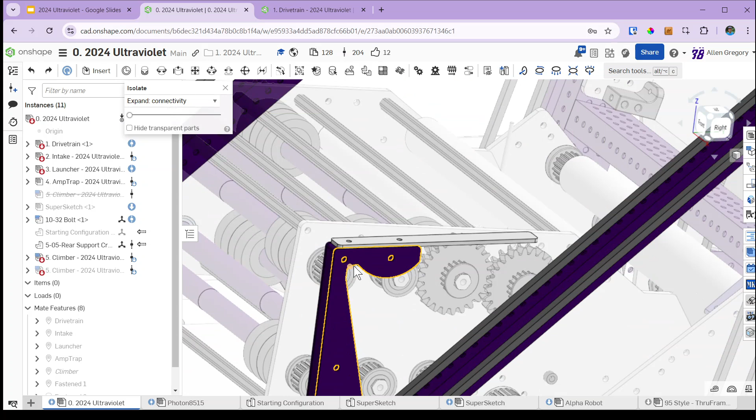They would just ride up and down the chains here. We'd be able to drive into the chain that's on the stage of the field. The chain would kind of get locked into this little loop here, and as we pull back down and are still driving backwards, we're able to grab the chain and it lifts the robot up. It works in combination with our amp trap, so that's the part that's going to roll and kind of slide against the wall as well, to be able to take us all the way up without the robot just tipping over or anything.

In addition, we did have to chain tension any chain runs that you have. The chain itself will actually stretch, even though it's made of steel. If you use it enough, it will start stretching a little bit. So you always want to be able to tension any chain mechanism you have, especially if they're highly loaded, like these ones are, where they're holding the whole weight of the robot.

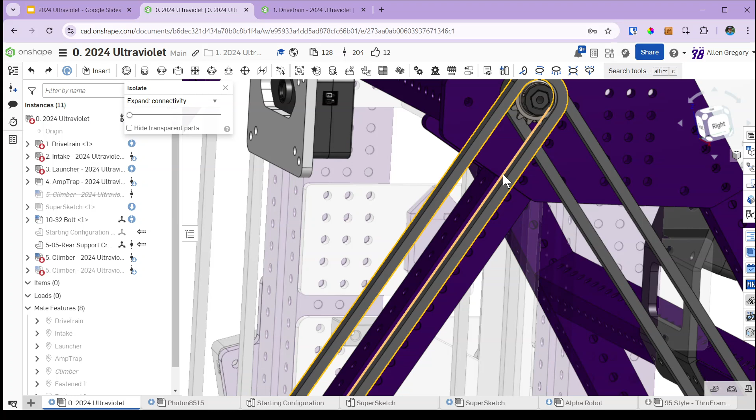And so we built in these little turnbuckles because this chain never loops all the way around. It's not like our intake or launcher belts or anything. They only ever run from this position up to that position. And so if we look on the robot, there's a little tensioner here that allows us to basically bolt the two pieces of chain together and change their length a little bit, and we can make them tighter. And so we were able to do that nicely here, and on our elevator we do the same thing.

And that allows us to make sure the chain's never going to hop off the sprocket like you would have on your bike. If your chain ever came off your bike, you know how annoying it is. We don't want that to happen in a match. So we use those chain tensioners to prevent that.

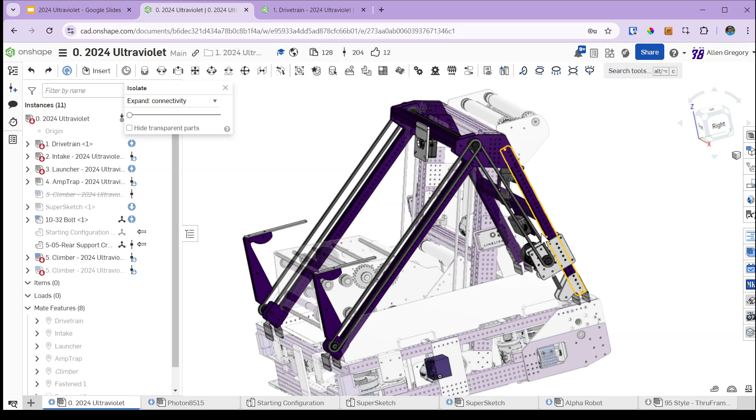We couldn't do that here. We had this chain run coming from this motor. If you think about how long this one is, this one ends up being shorter. And so you couldn't just have a chain tensioner in the same place that you do here, as it's eventually going to try to hit this sprocket and want to go around it, but it couldn't. So it would stop our climb height. So we had to be able to tension this chain in a different way. And so we did that by basically using the same or a very similar turnbuckle. I think we made one for this.

And so this bolt here and this bolt here, one side has an opposite thread, so it's a left-handed screw. And so for that one, when you turn it counterclockwise, instead of getting looser, it actually gets tighter. And that lets us tighten this up and pull this whole plate down towards this bolt. And so because we could do that, we could tension this chain well, even though we couldn't put an inline chain tensioner in the chain itself.

We could basically accomplish the same thing by moving this whole mounting plate and using this rail to slide it down. So we never actually bolted into any of these center holes. We just had standoffs on the outside that we would use to clamp the whole thing.

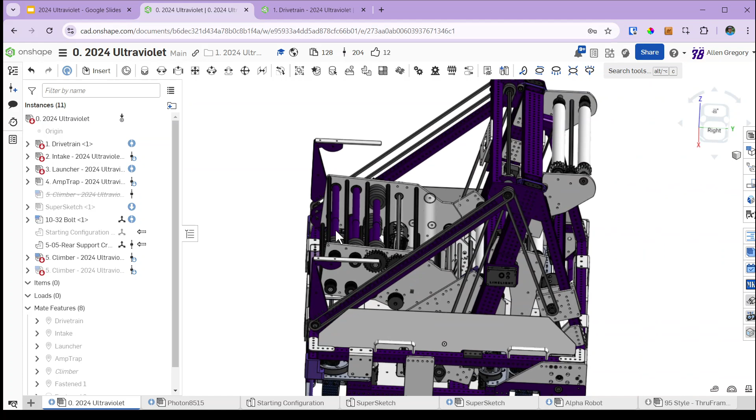And then you'd have this as our tensioner to pull it all the way down. The other parts of this robot, I'm going to go pretty quick because we're already at like the hour. This robot has 5 different limelights on it. The limelight is a smart camera, basically. It's able to do some amount of computations on what it sees, and then send information back to the main controller of the robot.

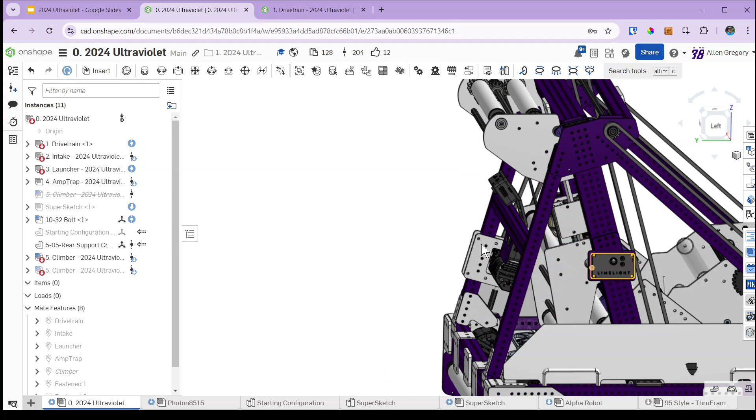So we have one here on the left side, one on the right side, one on the front up here, and then we have 2 on the back. So this one on the back here and the other 3 that we showed are all doing the same thing. These are used for April tag localization, which means they're able to see these very simplified QR codes called April tags that are placed around the field. When the camera sees it, it's able to know its position in relation to the center of the robot, and it knows where the tags are supposed to be on the field itself.

From that, it can calculate where it thinks the robot is based on where it's seeing those markers around the field. So if you have 4 cameras on all sides, no matter which way your robot's looking, it's hopefully going to be able to see some of those tags and always know where the robot is on the field. With that information, you can aim at the goal, turn towards the amp to score into it. It helps in autonomous mode, where it can relocate itself and make its positioning a little bit better. So there's a lot you can do if you know your location on the field.

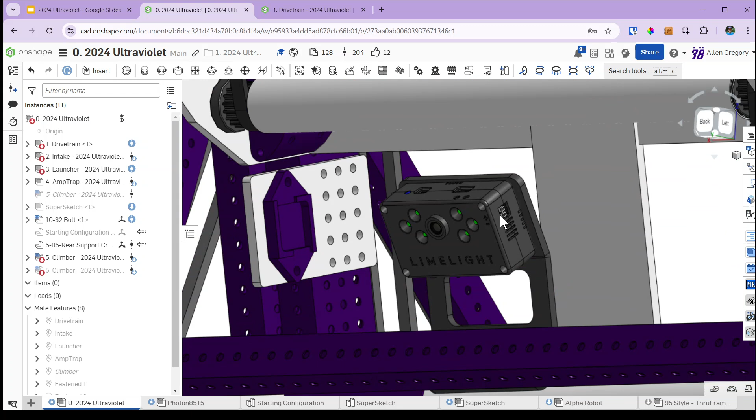The 5th camera here is pointing down out in front of the robot's intake, and it's used for actual note tracking. It has a machine learning algorithm running on it, trained to detect that orange circle that is the game piece this year. And so it was used any time that the pilot couldn't actually see the notes.

There were a couple corners of the field where, if a note got stuck in the corner, there's nearly nothing you could do as a driver or pilot to actually see it. In that case, the pilot could just point the back of the robot in the general direction, hit a button, and the robot would automatically try to align and go get that note off the ground. So even if the human couldn't see it, the robot could do it on its own.

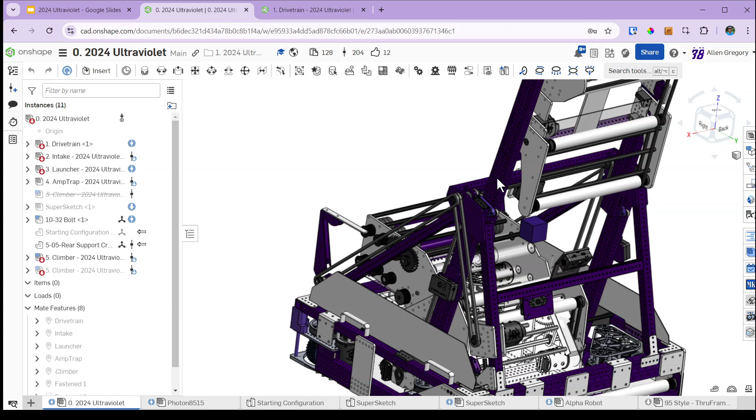Other climber parts that we didn't really talk about: we have the support bars. A lot of the work is also making sure the structure of the robot is strong enough to do everything it needs. There's a decent amount of load when the robot climbs. The whole robot's trying to rotate backwards and push against this assembly. So we want to make sure these rails down here are mounted well enough that they're not going to start bending when the robot's climbing. We want enough mounting points and places to run wires, and to support the whole robot wherever we can.

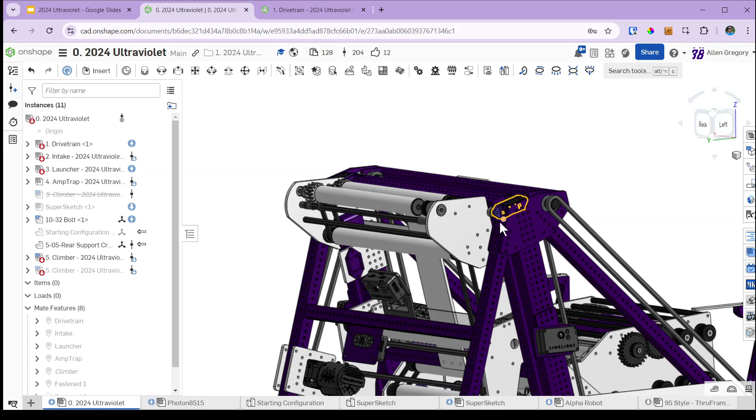Yeah, so that's pretty much how we were able to get everything we wanted the robot to do packaged into a relatively small space. You can see a lot of things are almost running into each other. There's a lot of little things we have to make sure don't clip or hit. So all of it gets done in CAD to make sure we're not having any interferences, and we're still able to accomplish everything we need to in this game. All right.